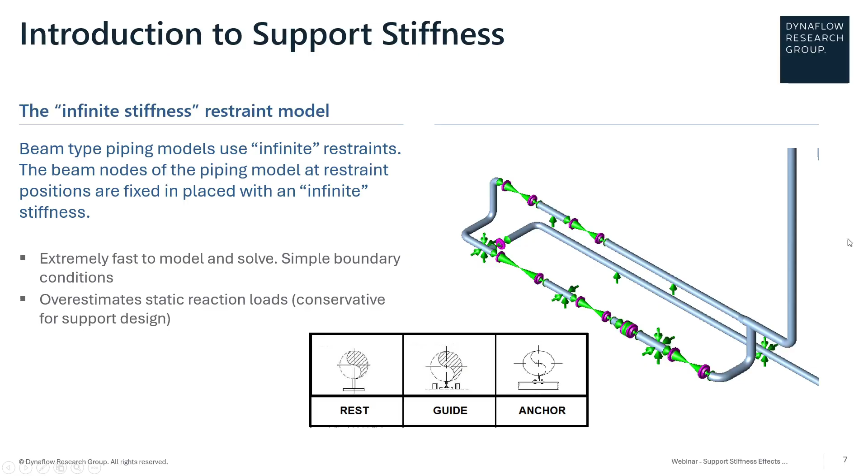But in the real world, a pipe support is not infinitely stiff. Take for example this pipe guide support on top of some steel beam. When we apply a force to the pipe, the support beam will bend somewhat, and how much it will bend will depend on how thick and how long the beam is. Here we give a formula for calculating the stiffness for such a beam.

It depends on the Young's modulus of the material, E, the area moment of inertia, I, and the length of the beam, L. From the formula we can see that the length has a very large influence because it appears in the formula to the power of 3. The area moment of inertia depends on the steel beam's cross-section, where we can roughly say that the more material the cross-section has away from the central axis, the stiffer it will be for bending.

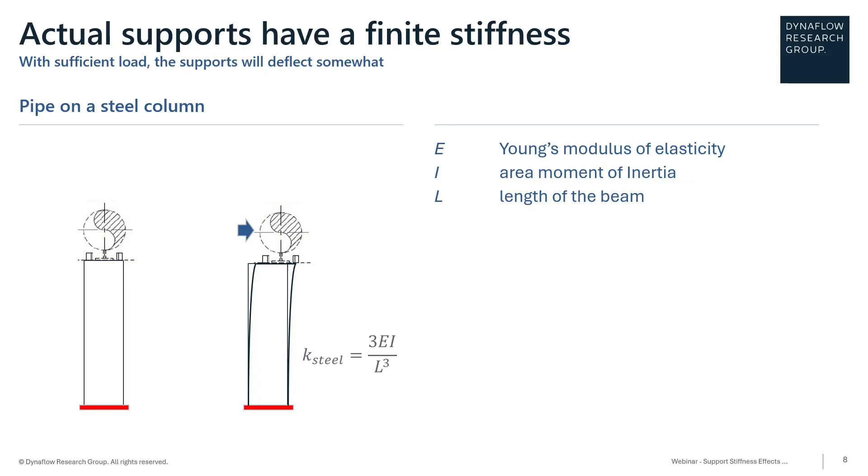Not just the steel structure has a stiffness, the pipe shoe also has a stiffness. In the case where more complex structures are involved, we might have structures on top of structures in order to have combined stiffnesses. And depending on the design of the shoe, these can be either relevant or not relevant.

When there are two things, each with a stiffness, and they are combined in series, then the combined stiffness can be calculated with the formula shown on the right here. The main takeaway from this formula is that if one of the two stiffnesses is much higher than the other, then the combined value will be close to that of the lower of the two. And when the stiffnesses are the same, then the combined value is roughly half of the individual stiffness.

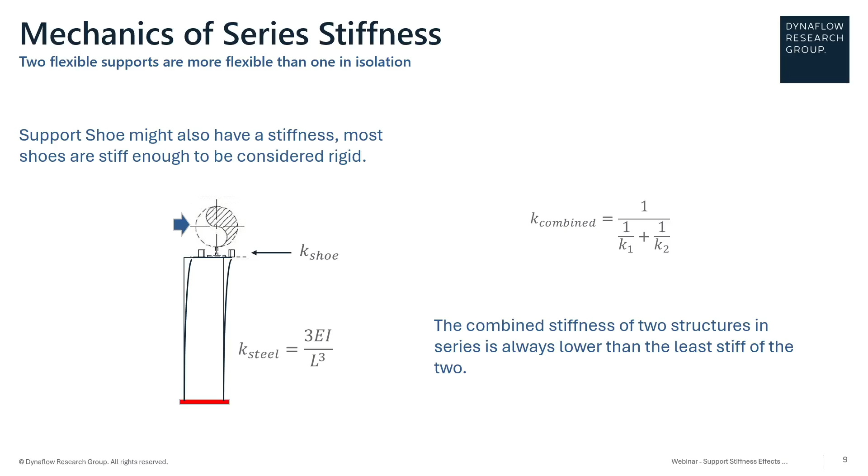So in pipe stress analysis, as we discussed, rigid supports are commonplace. Many stress analysis packages will assume a default stiffness for rigid support, which, in the case of CAESAR II, is 10 to the 12th pounds per inch. As we discussed before, for static analyses this is often acceptable or will even lead to conservative designs. But for dynamic analysis, this will lead to an overestimation of the mechanical natural frequency of the system.

The mechanical natural frequency of a spring mass system is given by this formula. So it goes with the square root of the stiffness, K, over the mass. And in case the stiffness of a system is modeled much higher, we will also overestimate the mechanical natural frequency that's calculated.

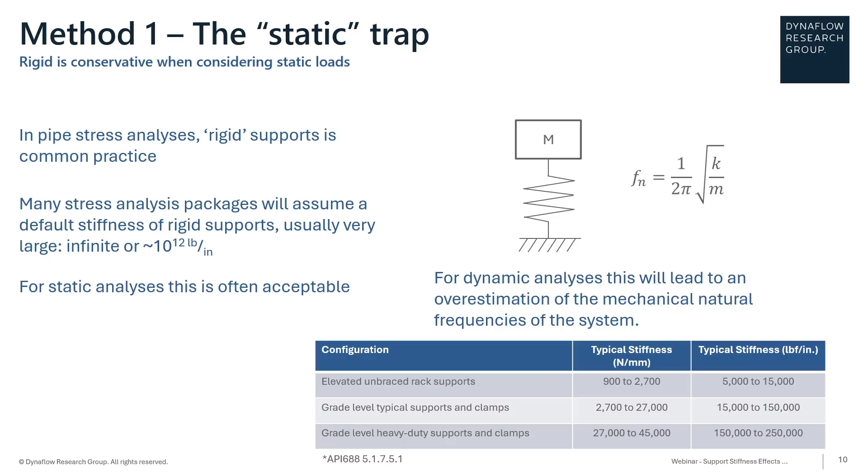In this table, we show some typical values for axial support stiffnesses as defined in API 688. If we compare the 10 to the power of 12 pounds per inch with the typical stiffness values, even at grade level with heavy duty supports and clamps, we reach roughly 250,000 pounds per inch as typical. So this is many orders of magnitude lower than what CAESAR will use as a default support value. If we then look at the actual modes of the system, those will be way off.

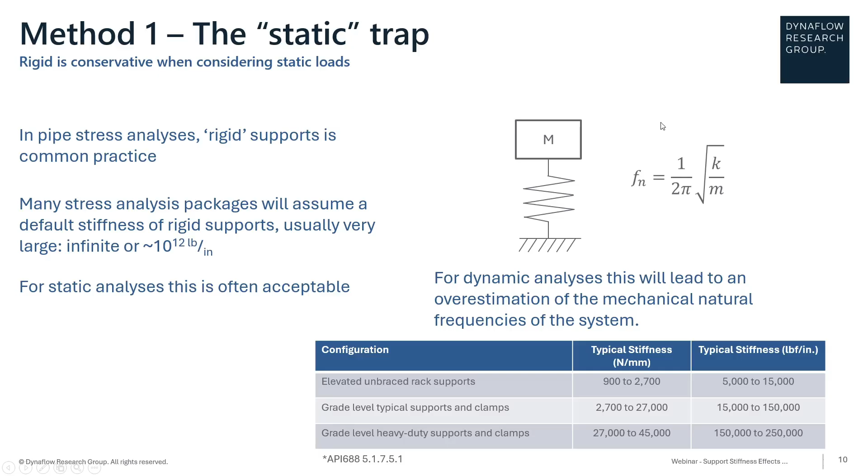So let's talk a little bit more about this resonance of systems. Let's take a look at what happens when we suddenly apply a load to a mass spring system. First off, if we apply a static load to a system, we can use a simple formula to calculate what would be the maximum displacement. In the graph on the right here, I've indicated that with the orange line.

If we apply this force dynamically, so on the left side we show the force versus time graph, where at time 0 no force is applied, and then it's very quickly ramped up to one value and kept constant after that. Then the response of this mass spring system will be that the system will first overshoot the static response value, then it will come back down and it will oscillate back and forth until it finally stabilizes on the same value as what we calculated from the static response.

This type of graph we can use to calculate what's called a dynamic load factor. The dynamic load factor is defined as the maximum response of the system in the dynamic case compared to the maximum response in the static case. So keep in mind that in both those cases the amplitude of the force is the same. It's just that the timing is different.

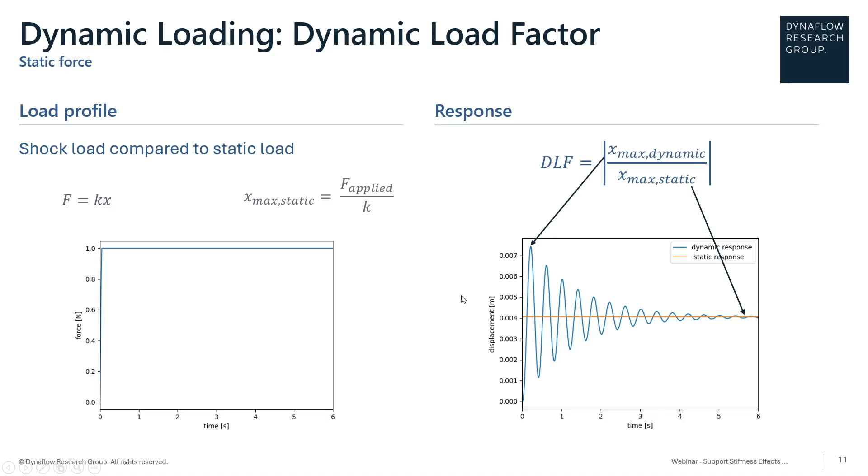But what would now happen if, instead of applying a shock load where we instantaneously raise the force to a constant value, we vary the force with a specific frequency? Now it depends on the frequency of the force with respect to the system's mechanical natural frequency, how high this dynamic load factor can become. The maximum value is obtained when the forcing frequency exactly matches the mechanical natural frequency.

On the right side here, we have a formula that can be used to calculate what the dynamic load factor would be. It's a function of the forcing frequency, omega f, the mechanical natural frequency, omega n, and beta, which is a damping ratio.

On the left side, I've plotted this expression for a different number of damping ratios. And you can see that when the forcing frequency is very close to the mechanical natural frequency, so their ratio is close to 1, we can get a very high amplification of the movement.

It is important to know that API 688 specifies a damping ratio of 1% unless other values are available. And in the case of 1% damping, the DLF for a harmonically driven force on a mass spring system is 50. Meaning that the response of the system, or the displacement, can be 50 times as much as the static force when it's applied harmonically at the mechanical natural frequency.

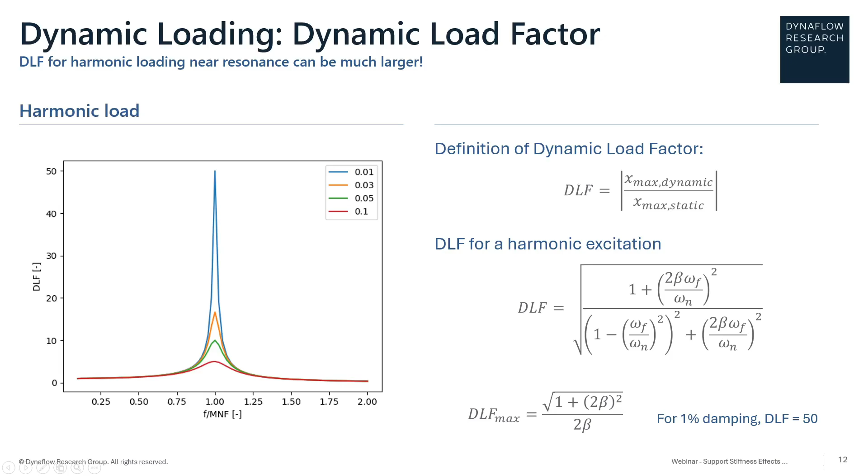We have shown this formula before, the mechanical natural frequency of a mass spring system. If we look at an actual stop in a pipeline, and it will be modeled as, in air quotes, infinitely stiff, this would give an infinite resonance frequency. However, this is incorrect, and a realistic value of the stiffness could yield a mechanical natural frequency that's close to the excitation frequency.

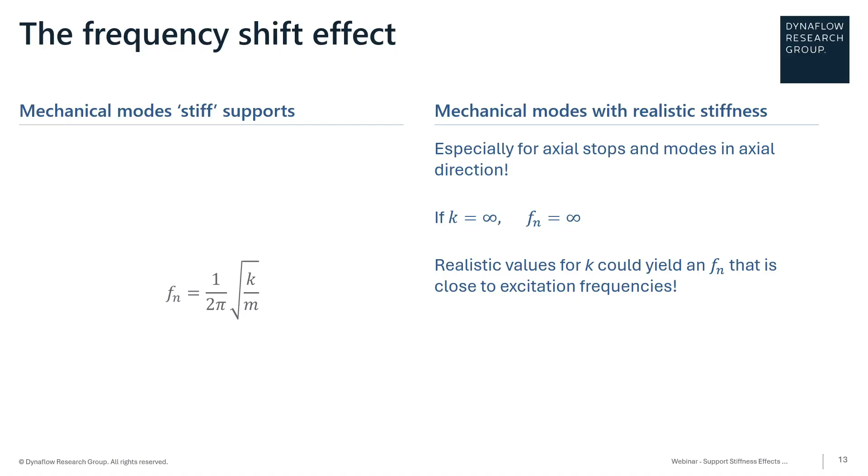The API 618 code talks about separation margins to deal with this issue. And in order for a design approach 2 study to pass, the mechanical natural frequency of a support or of the piping system as a whole must be shown to be separated by at least 20% from the first and second harmonic of the excitation frequency. The excitation frequency will be fixed by the running speed of your compressor.

As an example, if a compressor is running at 8 Hz, that means that the support should be so stiff that the mechanical natural frequency is at least higher than 19.2 Hz. So 20% over 2 times the base frequency.

If axial supports are modeled as rigid, this might be achieved. But in reality, it's not straightforward to create a support structure that's so stiff that it will have a mechanical natural frequency this high, especially when the pipe is at an elevation. You can think back to the table that I showed before with the typical support stiffnesses.

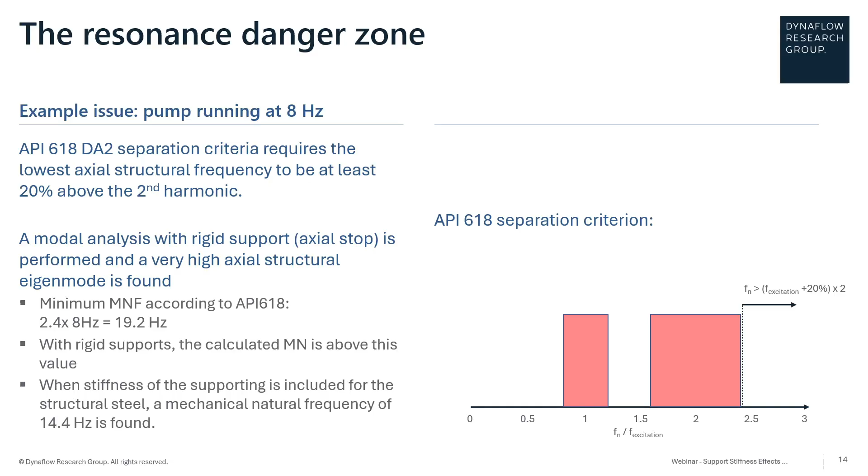All this will serve as a warning to help you realize that when a dynamic study is performed, the supports need to be included in more detail than what is required for a static analysis. But if this rigid supporting is not sufficient, how can we do it better?

And this brings us to method number 2. So instead of modeling the restraints with an infinite stiffness or the very high default stiffness, the stiffness of the support will have to be calculated separately. And this can be performed, for example, by a structural department that does the calculation for your support structure, or by you yourself. And you can use various methods to calculate these stiffnesses,

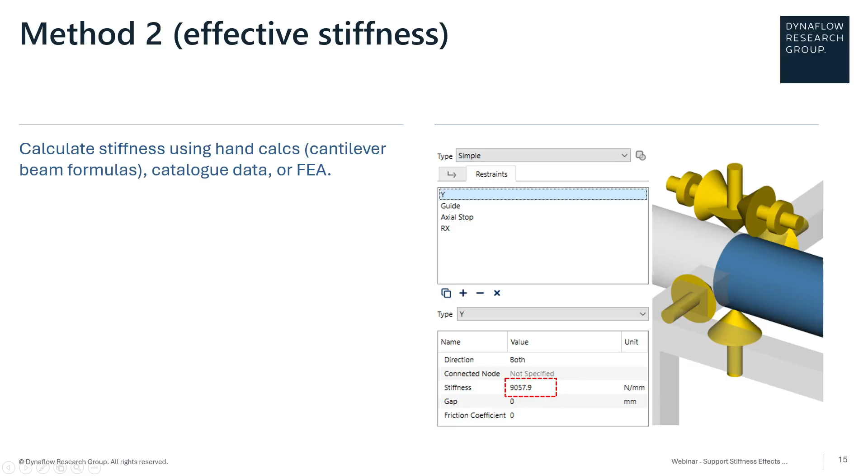So let's have a short overview of comparing those modeling methods. Method number 1, in which we will assume that the supports are, in air quotes, infinitely stiff. This will overestimate reaction loads in static calculations, and as we discussed before, is not suitable to be used in dynamic analyses. The modeling effort is low and the computation speed is the fastest. So this method should be used for simple static stress analyses.

Then method number 2, where we model the supports as springs, is a realistic way of doing static analysis, but does not have the same conservatism. And for this reason, method number 1 is preferred for the static analyses. Method number 2, however, is suitable to use for dynamic analyses.

It lowers the calculated structural mechanical frequency to a realistic range based on the flexibility of the calculated support. In terms of modeling effort, it requires some additional steps to input the stiffnesses for each of the supports, and those need to be calculated, of course. The computation time is still fast. The additional stiffness adds some complexity, but the number of degrees of freedom for the system remain the same as in method number 1.

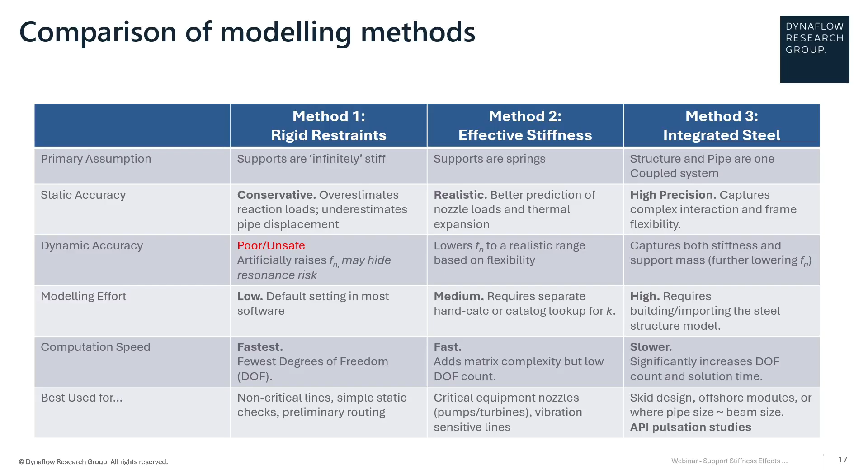The best use cases for method number 3 are skid designs and offshore modules, especially when pipe sizes are similar in size to the beam sizes. And also API 618 pulsation studies. The integrated steel is the best used method.

To summarize a little bit, for standard piping, method 2 is a choice. If you have some kind of dynamic force, method 2 can be sufficiently accurate, especially if most of your supports are single support posts that are relatively close to the ground.

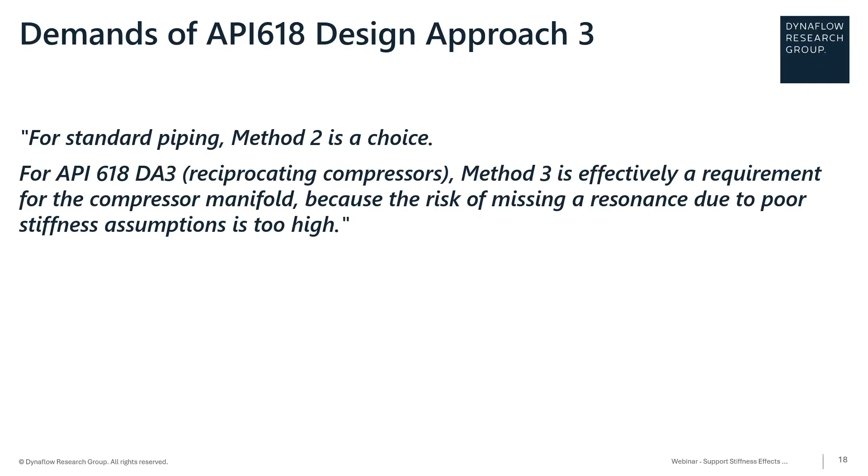However, for API 618 Design Approach 3 of reciprocating compressors, method 3 is effectively a requirement, as the stiffness of multiple elements, and not just the piping and the supports, but also the stiffness of the compressor body and the pulsation suppression devices needs to be accounted for in order to have an accurate prediction of the mechanical natural frequencies of the systems that are going to be used to calculate the vibration levels in order to pass the API assessment.

Let's next have a look at a few examples of how we can use these modeling methods in our program.

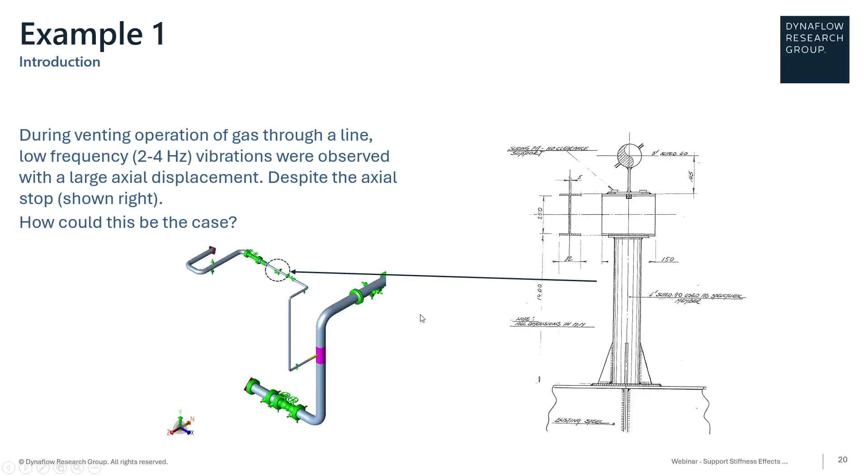The question is now, how could this be the case, as we have these large axial displacements? So let's first have a look at if we import this model into BOSpulse and see what the model will look like and how the mechanical natural frequencies are.

So I have the model here in CAESAR. I'm going to first show our effortless import feature of BOSpulse for CAESAR models. So I'll close this CAESAR model.

In the main interface of CAESAR, I will go to Interfaces, CAESAR II neutral file. This opens a pop-up that allows me to convert the CAESAR II input file, our model file, into what they call a CAESAR II neutral file. This neutral file can be imported into BOSpulse. So press convert.

And then once it's been finished, I say I don't want to do another one. And I can close out of CAESAR.

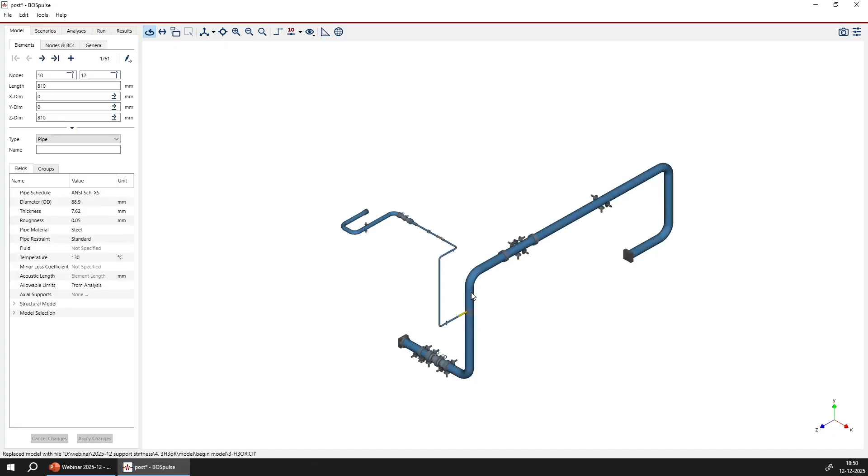I already have BOSpulse open with a new model, nothing inside of it yet. I will import a file. I select the .CII file, or CAESAR II neutral file. Press OK. In this case, I would like not to merge the elements. Press OK, and now here we have it. So as you can see, the CAESAR model is fully compatible with BOSpulse.

Here at this location, we have the axial stop, where the problem occurred.

So we'll set up an analysis to look for the structural modes of this system. As the analysis type, we'll select structural modal, and as the input we can specify from which frequency to which frequency we want the software to find the mode.

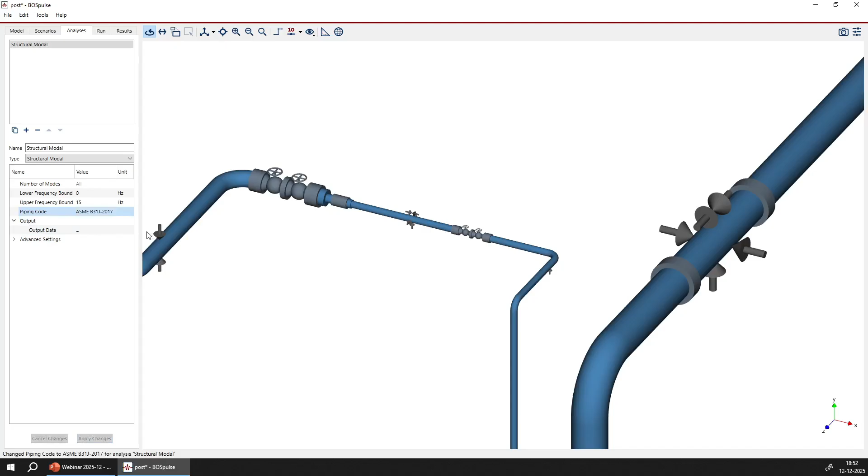The introduction to the problem gave that frequencies between 2 and 4 Hertz were observed. So I think if we go up to 15 Hertz, we should be able to see more than we actually need to. Under piping code, there's a possibility to choose one of the different piping codes, and this will be used to calculate the stiffnesses and flexibility factors of bends and T-junctions based on this code. I'll select the B31J since this is the most accurate in terms of stiffnesses.

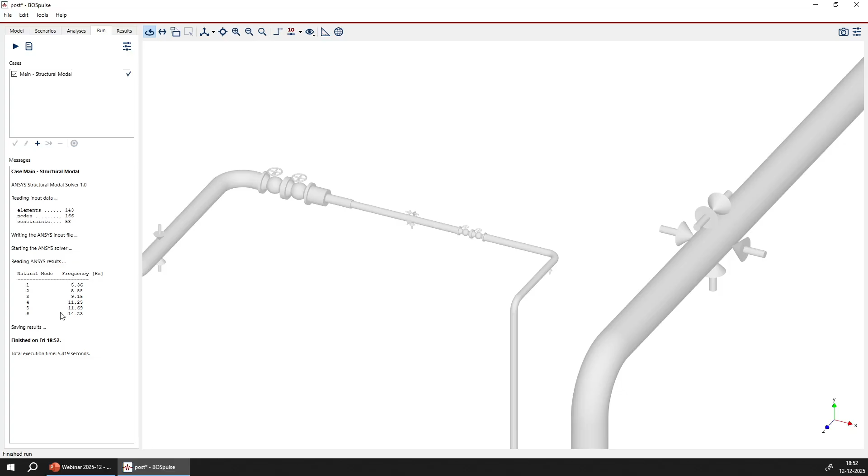Then I can go to run. We'll combine the main scenario with the analysis that we just started, and we can press the play button to run. In the background, this model will be sent to the ANSYS solver, and the result will come back into BOSpulse. So it's already finished.

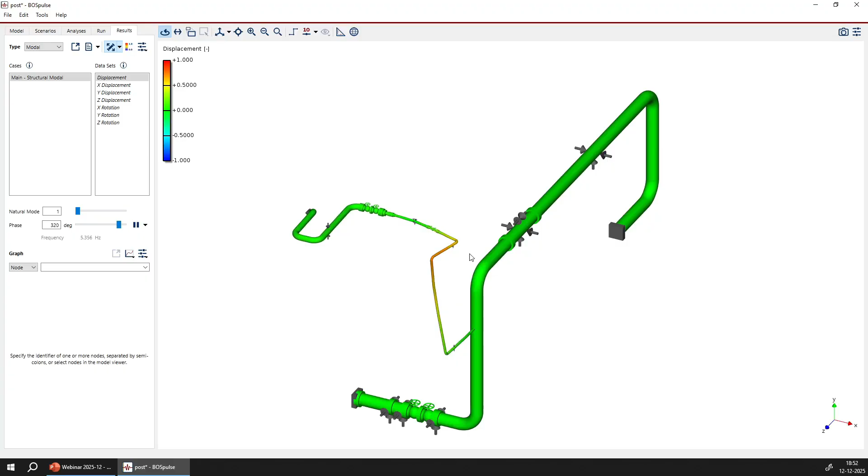I'm able to visualize the results now. I will find that for the first natural mode, if I press play, you can see the movement. So indeed we see movement of this area, but it doesn't match with the observed large axial displacement.

We look at the second waveform. We have a frequency of 5.9 Hertz. It's also moving differently than what was observed in the field. And then the next one is already at 9 Hertz, so it's a much higher frequency.

So let's go back to the drawing for a little bit. As we've discussed previously, this axial stop is modeled as a rigid support, but is this actually a rigid support? In order to assess that, we can have a look at the different parts of the steel structure.

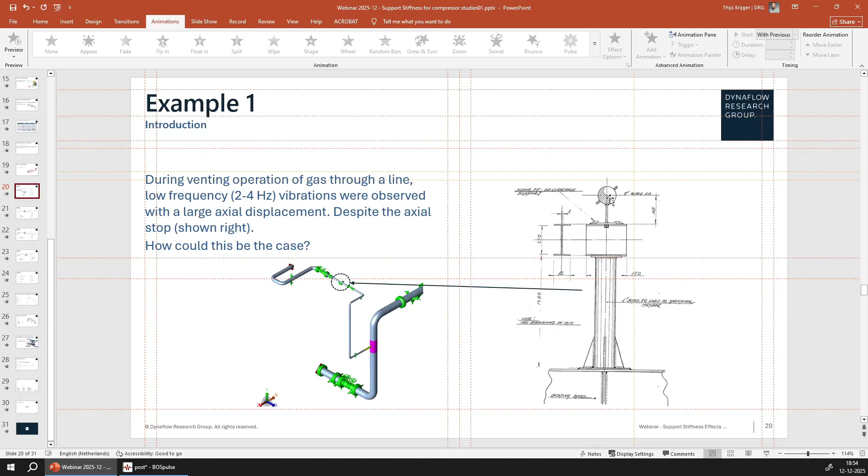The important thing for this example is what we want to look at: the axial stiffness, for a force that's out of plane or in the axial direction of this piece of pipe. We can do a calculation of what the bending moment stiffness would be of the different components. So we can identify the shoe, this I-beam, and this cylindrical support post.

First for the shoe, we can look at the cross section. We'll have, for the bending in the out of plane direction, if we look at the cross section - this would be the top of the cross section of this plate under the support shoe. We can calculate using standard formulas what would be the moment of area. Once we've calculated that, we can input that into this formula for the stiffness for this bending. We'll find a value of 82,000 newtons per millimeter.

The same thing can be done for this beam. Now, something you might have already observed is that this beam is being loaded in the weakest direction. We're going to have a force from left to right at the top here, and there's almost no material here that can withstand that bending. Schematically, we can look at this thing on the center here, and almost all the material is close to the central axis.

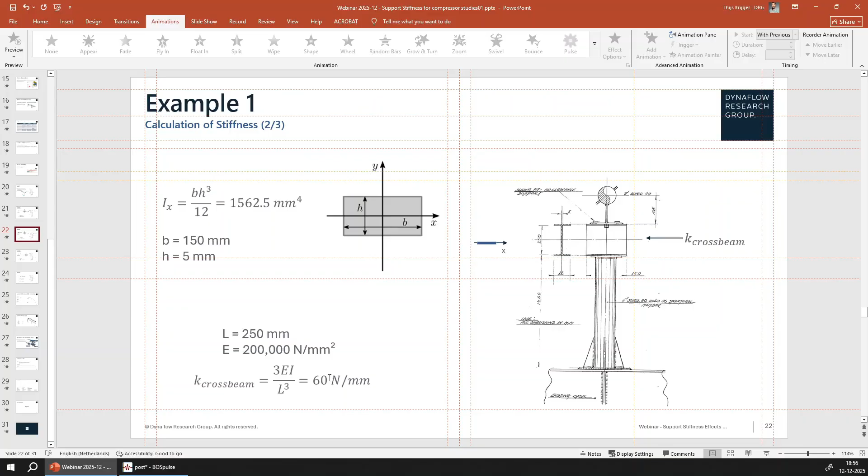So the second moment of area is going to be very small. And if we input that together with the length of this beam, we can find the value, the total value for the stiffness of this beam against the bending in that direction, to be only 60 newtons per millimeter.

Now the same thing can be done for the cross section of the pipe here. We use a standard formula to calculate the moment of area again, using the inner and outer radius of this pipe, and we find a value of 14,000 newtons per millimeter.

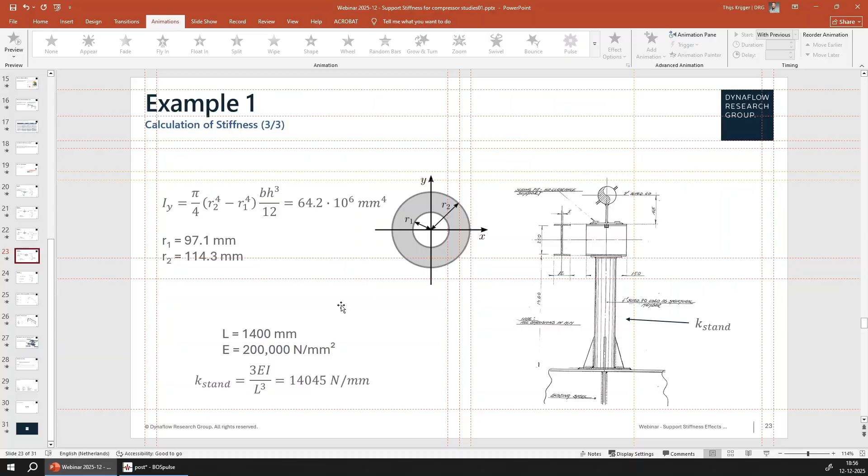Finally, we can combine those in order to get the combined stiffness that we can apply on our restraint at the node here. If we combine those three, you can see that it's going to be dominated by the lowest one. So for the cross beam, it's 60 newtons per millimeter, and then the combined one is slightly below that value, so roughly 60 newtons per millimeter.

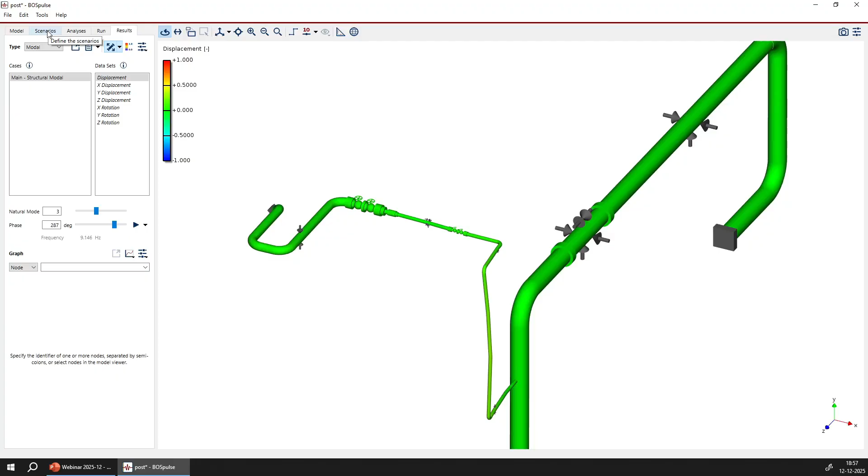So let's input that into our BOSpulse model. In the Scenarios tab, I will create a new scenario, and we'll call it method 2. Now we're going to make a variation of the main model inside this scenario, where under the support definitions, we'll look for the axial stop. In this case, it's in the X direction, and we can specify a stiffness value - we'll input the 60 we calculated before, or let's be precise, the 59.6.

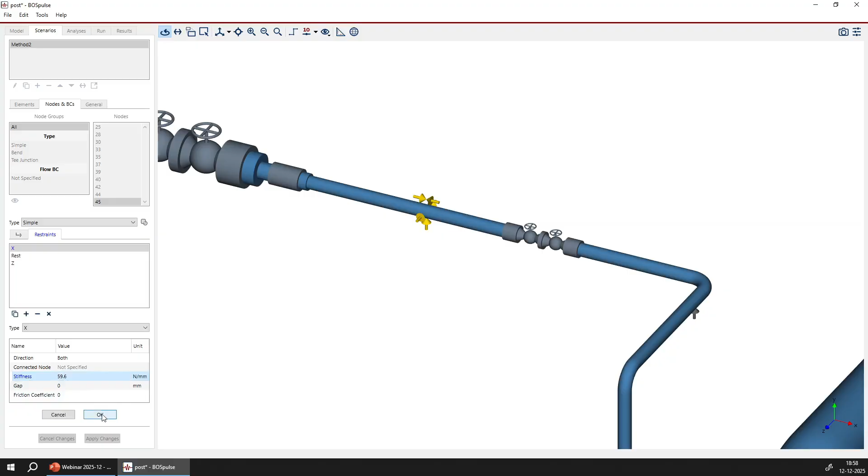We'll press OK. Then under Run, we can also combine the new scenario with the same analysis type. If we run that, we can also have both results available to us, so we can use that to compare.

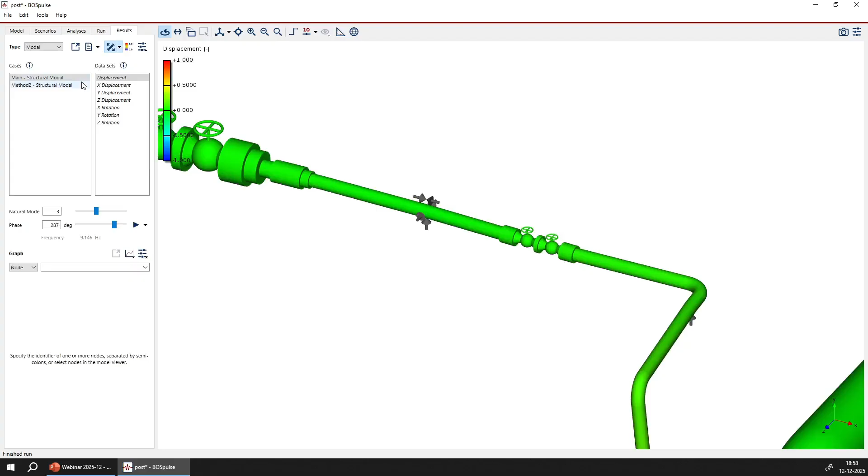So now, if we look at the lowest natural frequency, we find a value of around 4 Hertz, where we have this movement. So this already matches much better with the description that was observed by the people in the field.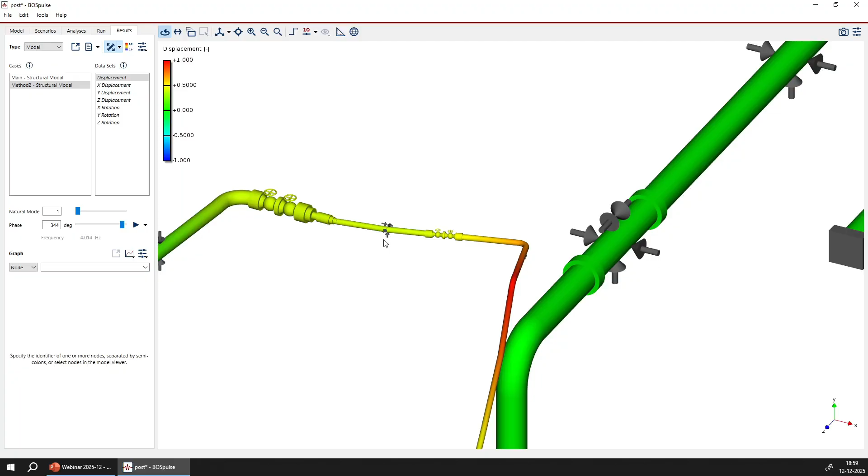So there's another method that we can use. We can also model the steel frame. So let's do that next. We'll add a new element.

We'll start by node number 5000 to be well away from all the other node numbers in the model. And we can use an ANSI schedule 80 pipe, which was what the support was made out of. The diameter will be 4 inch, and then our database will automatically fill in the thickness corresponding to schedule 80. The length of this thing was 1400 millimeters, and it was in the Y direction.

Right now it's located here at the bottom of the model because I haven't connected it to any piece, so it'll just be at the origin.

Now on top of that, we want to model this I-beam. BOSpulse has different structural beams included as options for structural members. We press plus to add structural beams - we have I-beams, channel beams, T-profiles, L-profiles, rectangular beams, or a beam for which you can specify your own moment of areas. So it can be basically any profile.

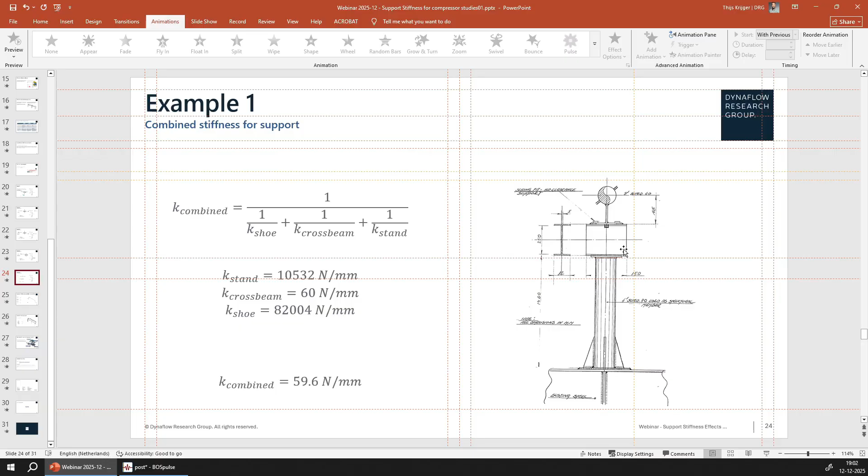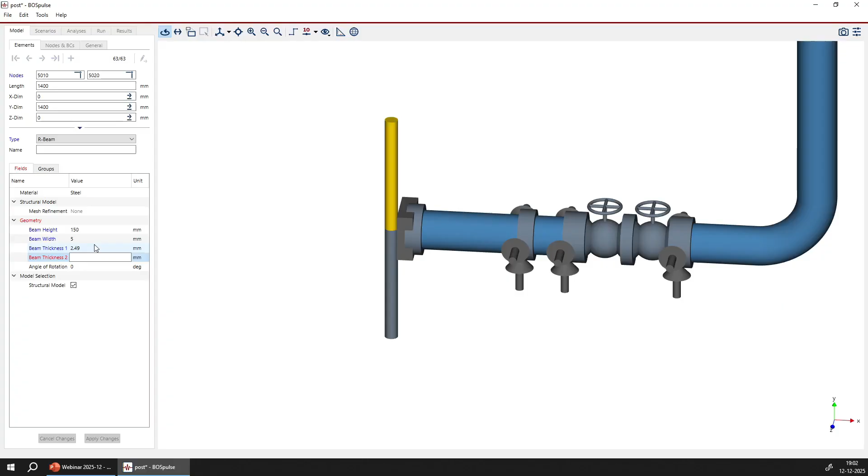So what I will do here is select an R beam, which is just a rectangular beam, and input the height and width to match the cross section. It's 5 wide, and as thickness we'll put half of the width, the total width of the cross section, so to make it a full square. The height of that thing was 150 millimeters.

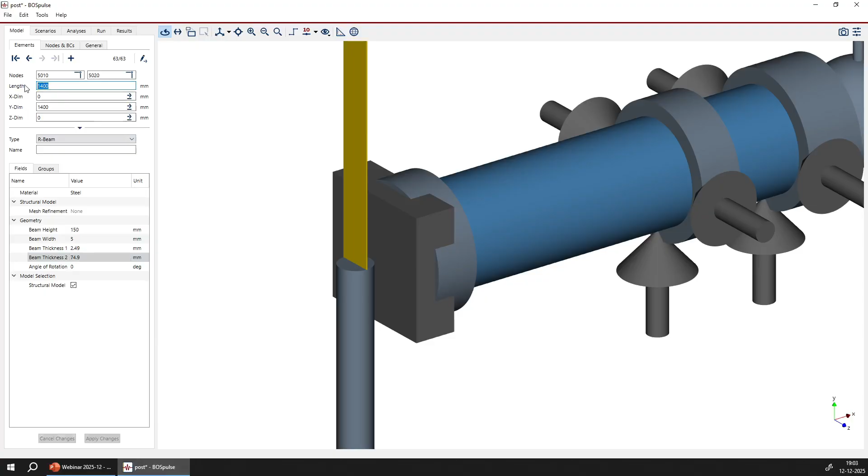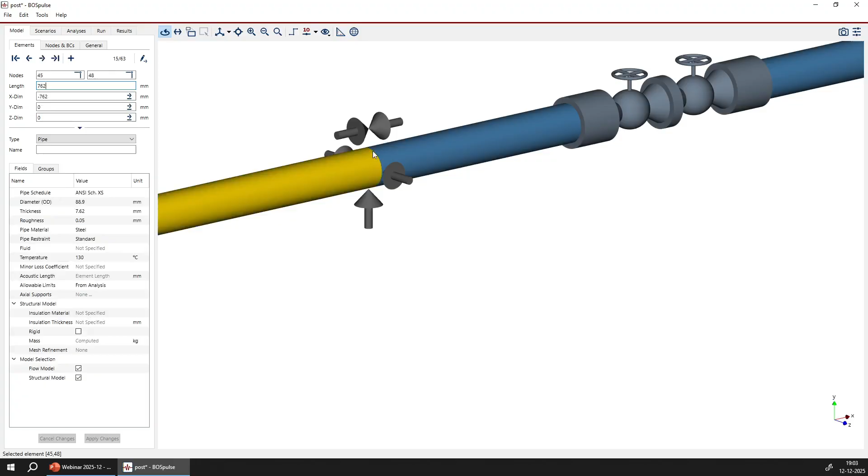And we've already seen that this was actually the most flexible thing. So I will skip the modeling of the shoe for now, and we'll connect this directly to our model here. This support node is node number 45. Then I'm going to make a new scenario where we will connect it to the system.

Method number 3, in this one we'll go to this support definition, and then we'll use connected node to connect it to the top of this I-beam profile. The same for the restraints in the other direction.

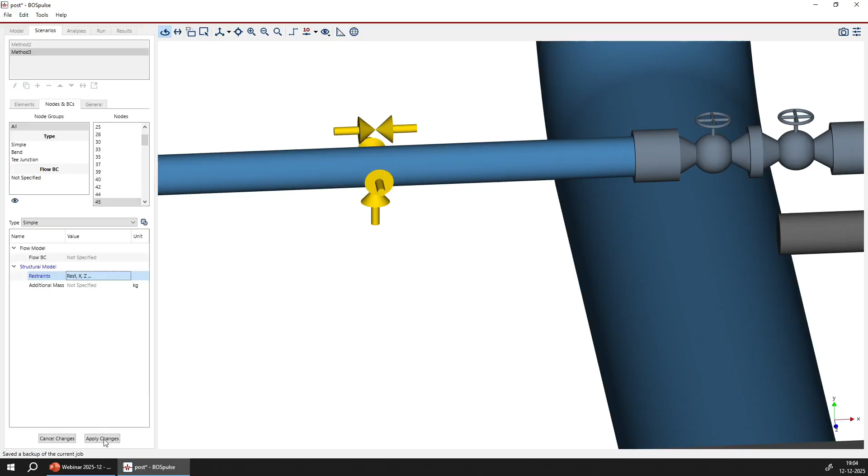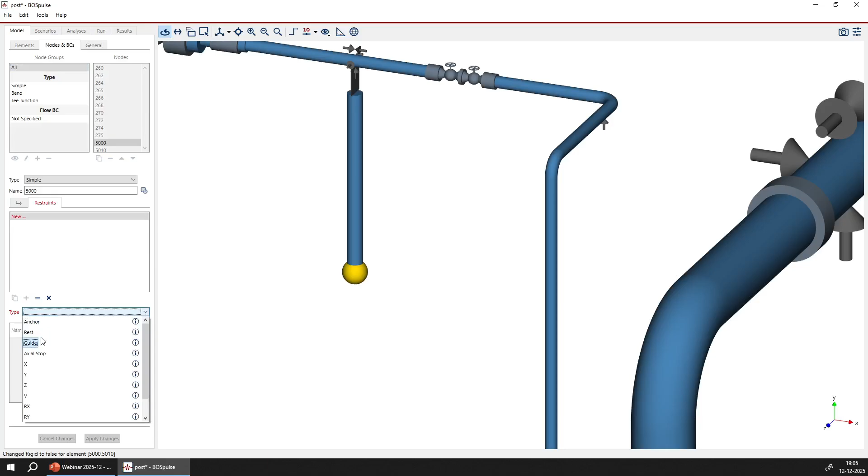So you can see it's not moved yet, but if we ask the software to update, we can move all the connected nodes to the same position. See that this one is specified as rigid - it's not the case, it's just a piece of pipe. And then at the bottom of that piece of pipe, we'll put an anchor where it's restrained to the ground.

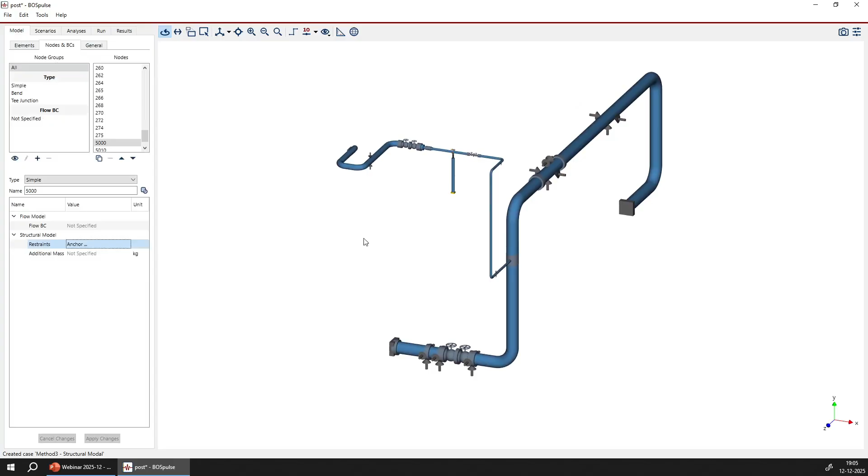Now we can run the analysis again. We'll add method number 3. And then, just to be sure, in method number... in the main part, we'll remove this from the structural model, so that the other two scenarios don't have this part included.

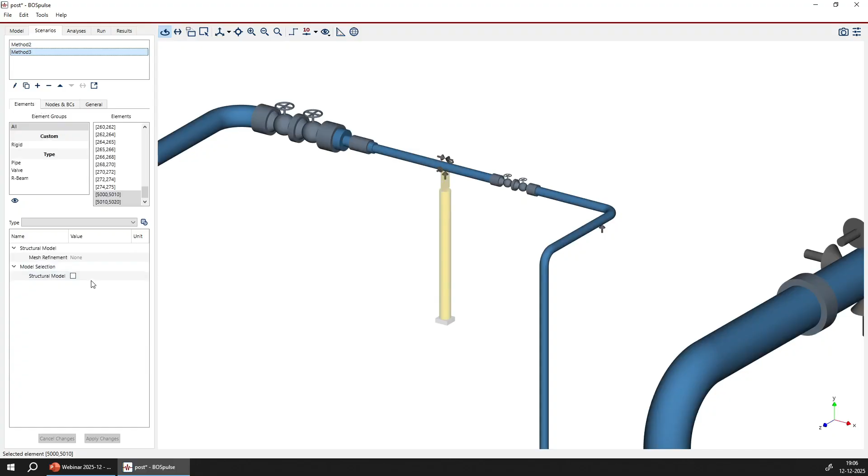And method number 3, of course, will have to enable it again. Now we'll run the 3 cases again. You can see, have a little look at the differences.

But here we find again a mode in which there's a large axial displacement at this axial stop, and in this case with including the supporting steel, and now we also include the masses of this piece of pipe that's moving, and we find a value of 3.5 hertz.

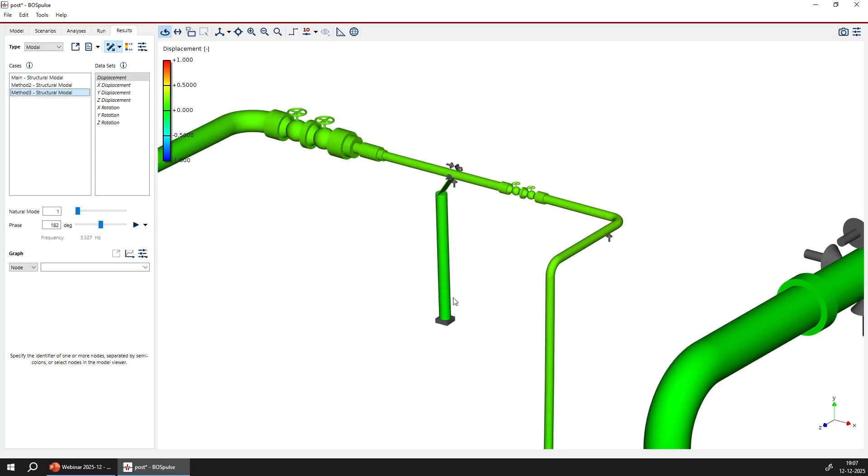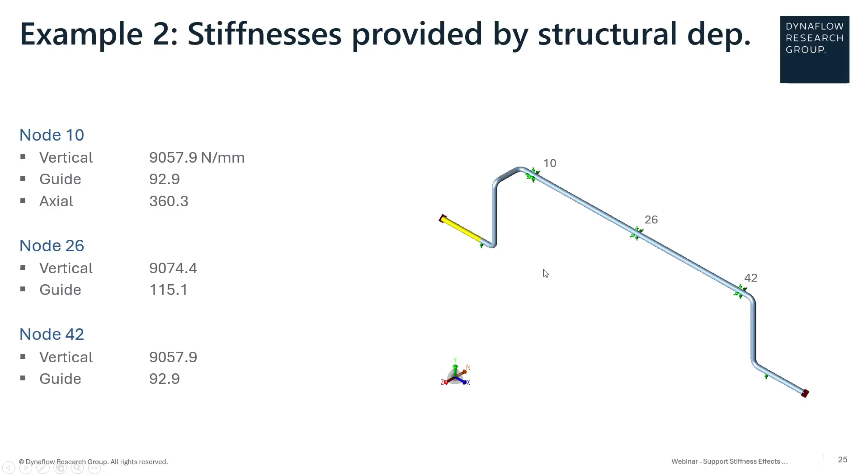So let's now move on to the next example. In this next example, we're going to have a look at this piece of piping that runs over a pipe bridge. In this case, the structural department has already provided us with the stiffness of the different supports on the pipe bridge, and I've already gone ahead and modeled that into BOSpulse. The next thing we'll do is model the pipe bridge itself, and I'll show you how you can easily do that using the structural I-beam modeler.

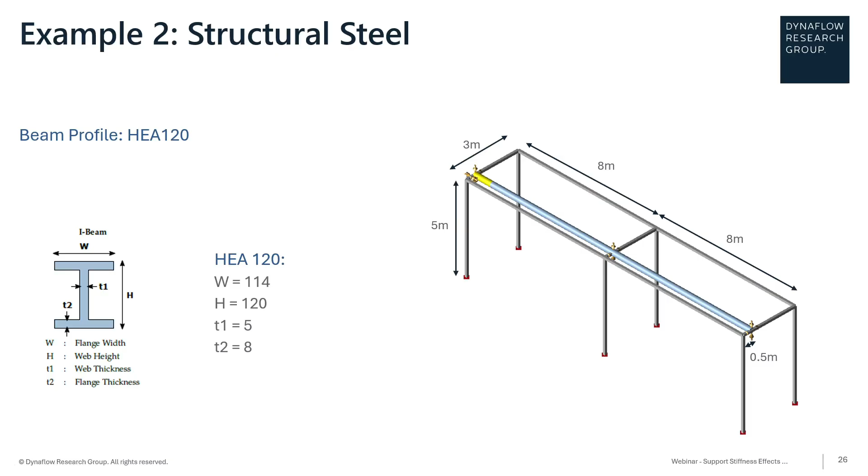So let's go into BOSpulse. Here you can see the model. It's already as described. Under scenarios, I already have 2 different scenarios - one where the supports are modeled as rigids, and one where we've calculated the stiffnesses. We go to support - you can see that the stiffness for the Y direction, the guide, and the axial stop are already input.

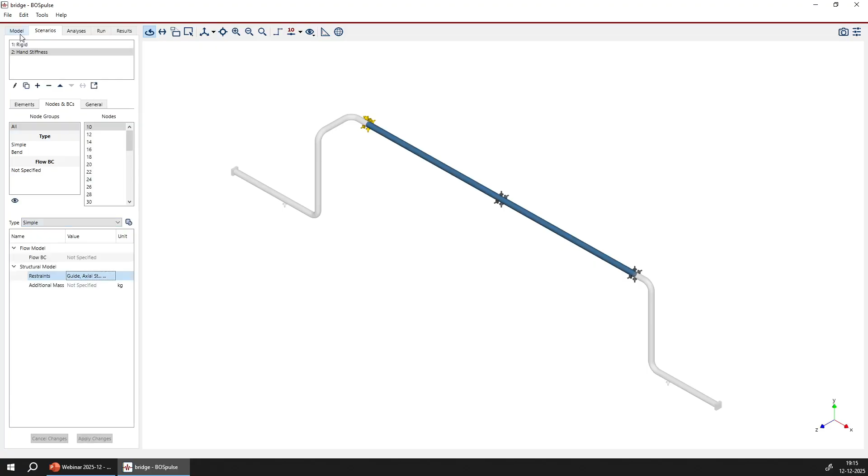So next up, we'll show how you can relatively easily model a bridge structure as it is shown here.

So we'll go to our modeling mode and start by creating a new element. I'm again going to start at 5,000, and in this case I'm going to go to 6,000. I'll start by modeling this leg here, so we'll go up 5 meters, and we'll change the element type to an I-beam.

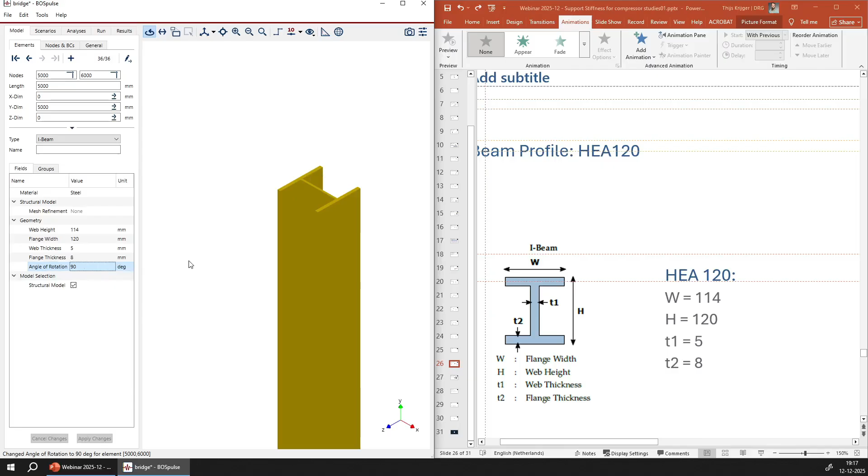The profile was given here, so it's an HEA 120 - a pretty standard beam. Used for the web height, these values - the web thickness is 5 millimeters and the flange thickness is 8. I know that in our case the beams are oriented in this direction, so I'll put a 90-degree rotation on it.

I will also for now untick this box for structural model, so that we can again do the same thing as in the previous example, where for the other 2 scenarios these beams are not included, and then for the 3rd scenario I will include them.

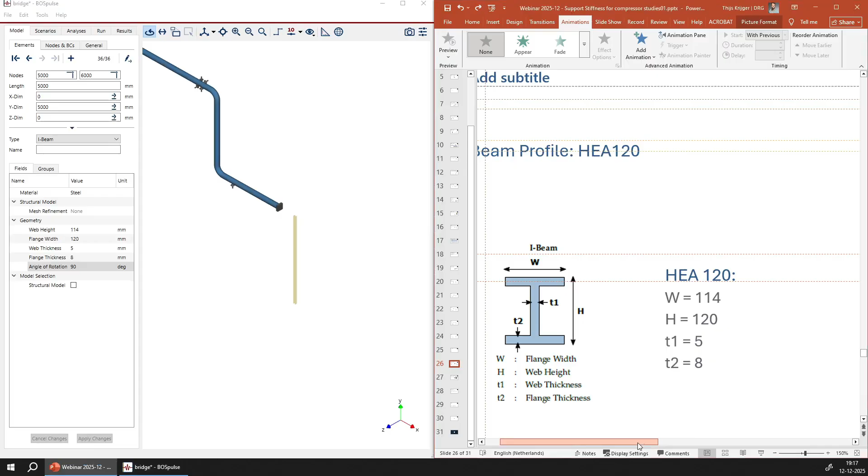So I've modeled the first leg, and now I'm going to choose my node numbers in such a way that I can easily replicate the repeating structures. First, I see there's a 0.5 meter distance between the corner and the place where we want to connect our pipe. So the next element will be 500 long, in the minus z direction.

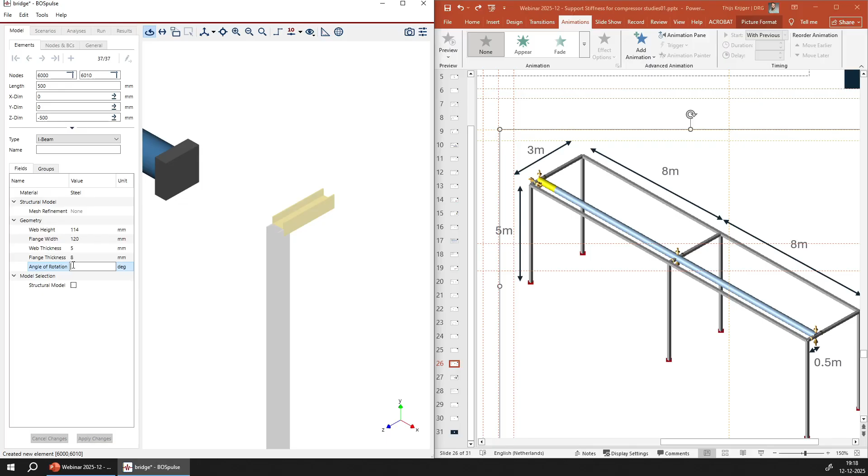Now this one is oriented in a different direction, so this will have to be 0. As a node number, I'm going to use 6100, and then I'll put the next one at 6200 with the remainder of the 2.5 meters.

Next, I'll also add this beam for 8 meters in the other direction, and for that I'll start from node number 6000 and go to 6010. I'll put it for 8 meters in the x direction.

In order to more quickly model the rest of the structure, we can use the duplicate feature. I'll select all of these elements, right click, duplicate elements. Now I'd like one copy, incrementing the nodes by 10, which will create from this one 5000, 5010. It's not connected anywhere from this node, and anything connected to this node will be duplicated and connect to this node.

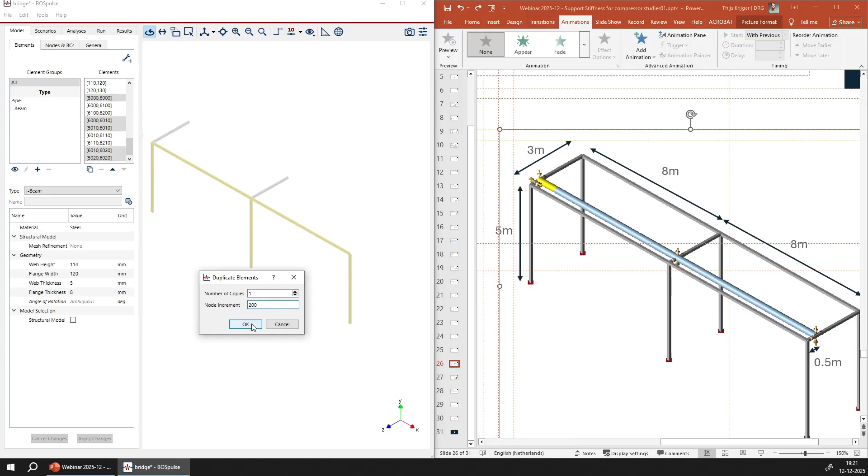Now all we have left to do is move or duplicate one side of the frame to make it on the other side as well. We'll duplicate it again. In this case I've put a node step of 200 between this side and that side, so we'll use an increment of 200. I see I've forgotten to select this part last time, so I'll do this one again with a node increment of 10.

All these supports are connected at the bottom with anchors - these are the legs of the structure, not the supports. So as a restraint, we'll input an anchor for all 6 of them. Apply the changes - so that's there. Now we have our structure.

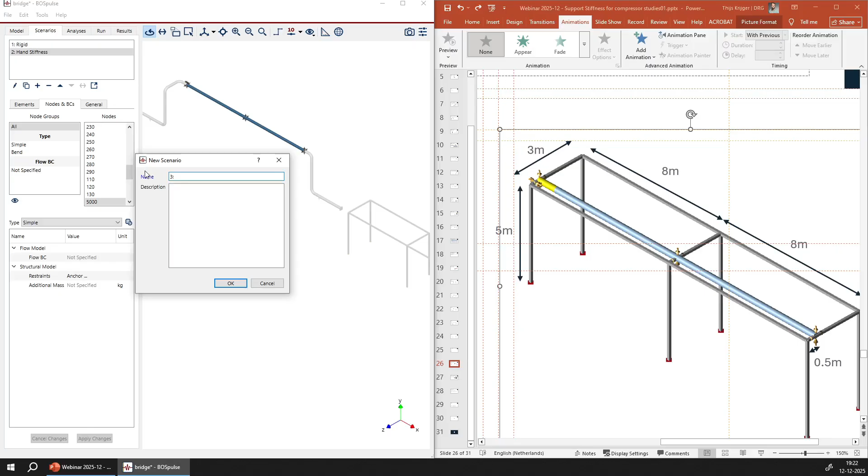Now we'll make our scenario and connect it to this piece of piping. So we'll create scenario 3, and in this scenario we'll start connecting these elements. Select the nodes, then change the connected node from undefined to 6100.

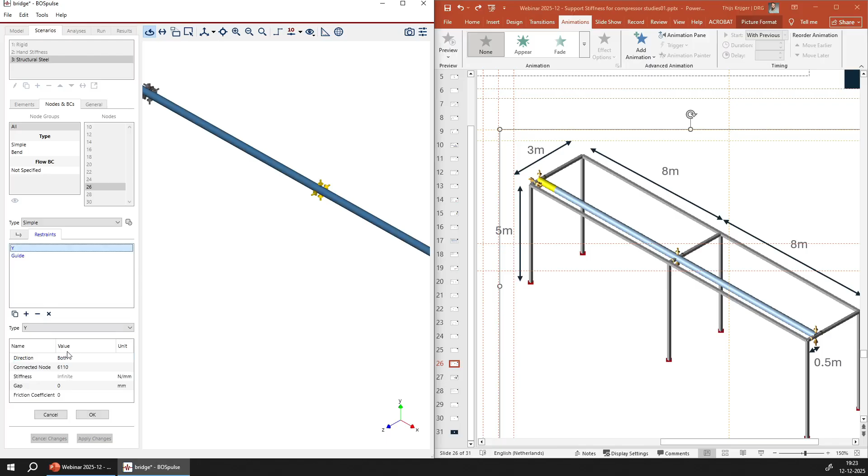Apply those changes, then do the same for this one, but this one's connected 10 higher. Sorry, this is stiffness field. Finally, the last one will also be connected to the frame.

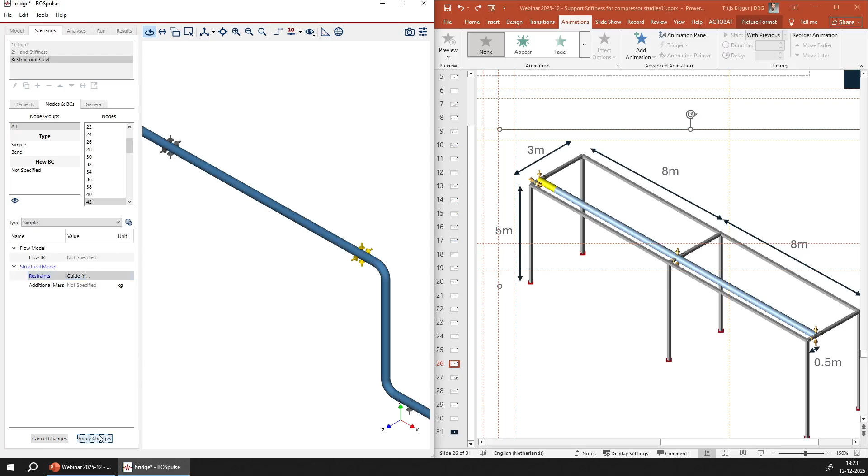You can change the coordinates again to tell the program to update the connected nodes. Now that we have the structural steel in place, we'll have to enable it for this third scenario. So go to the elements in the third tab. We can double click the I-beams to select all of them at once and turn them on in the structural model.

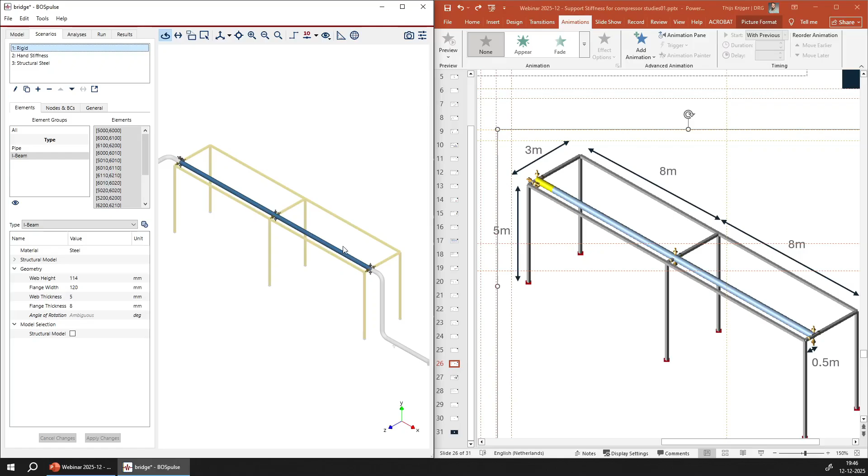In order to make the analysis and results more straightforward to interpret for this webinar, I've limited the piping in the other two scenarios to only the piping on the bridge. So I'll do the same for this last scenario. We'll select those and disable them from the structural model, and then the same here, disabling them as well.

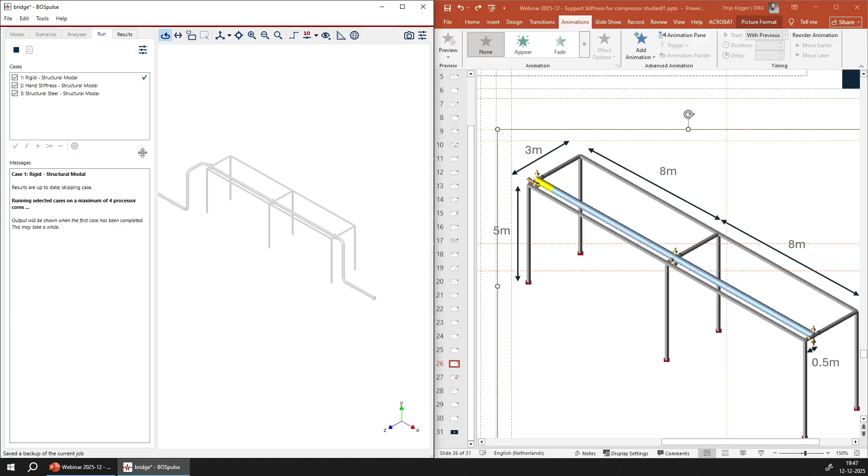We can go to the Run tab, run our models, and then compare the computed mechanical modes between the different methods of analysis.

At mode number 1, we'll find a mode at 0 frequency. This is an unrealistic mode, caused because the rotation around the axis of this pipe isn't restrained anywhere, so it's free to move in that direction. We can visualize it - if I go to the X rotation, you'll see the whole pipe is basically rolling in this mode. This isn't a real case, and we could have fixed it by applying a rotation restraint on one of these supports, so we'll ignore that one for now.

But if we go to the first real mode, when we model with the rigid support, we see this nice sine wave. It's at 11.8 Hertz, so relatively high.

The next one is again at the same frequency, but it's in the vertical direction. Then we'll see higher modes where now the two sections are moving in phase with each other—the same thing, but in a different direction. And now here we see the higher waves, or a double sine wave shape between each of these supports.

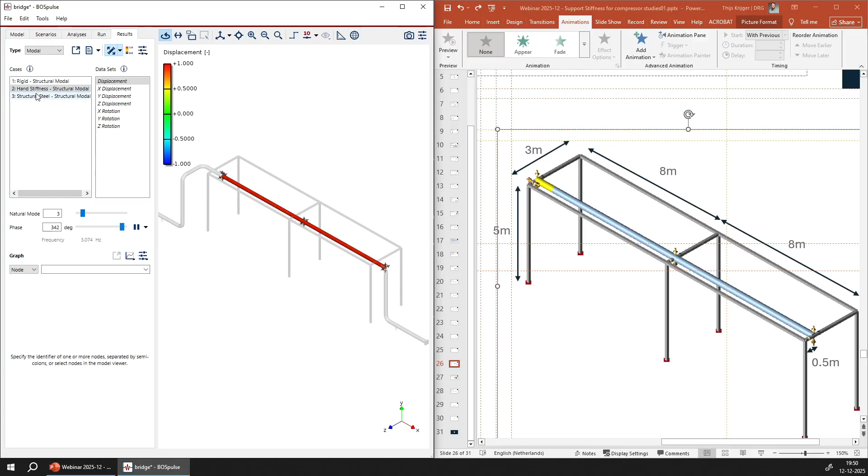Now if I look at the modes from the structural steel, you'll see the mode shapes are a little bit more complex because they involve not just the piping itself but also the movement of the structural members. Going quickly through the different modes: the second mode at 2.2 Hertz, the third one at 2.5, and then at 11.3 we find again where it started with the rigid support.

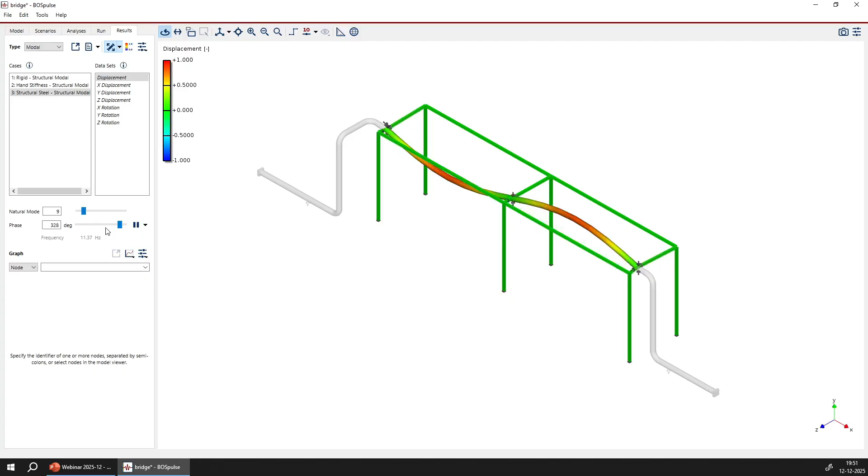Now you can imagine that if you have a lower frequency excitation with the force in the axial direction, it might be important to capture modes that are of this type of shape.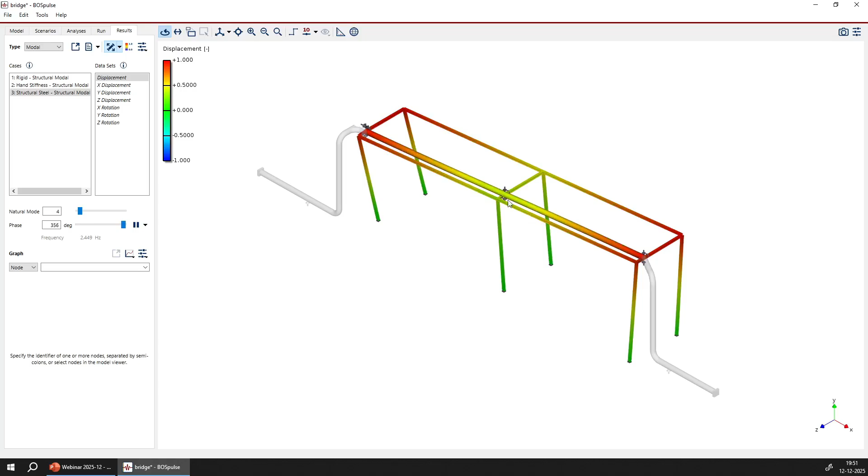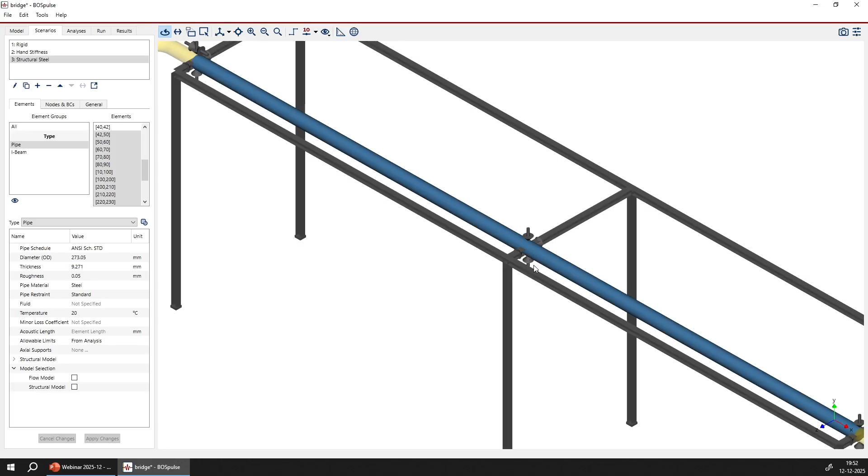So I hope I showed you the different methods for applying the structural connections. In this example, I modeled the connection between the pipe and the supporting steel as a rigid connection. If you have, for example, clamps with a known or pre-calculated stiffness, we could instead connect the pipe through a restraint with the C node with the stiffness of the clamp to the structural steel, which would have another effect on the calculated modes, but would be a more precise method of analyzing.

So to bring it all back, what does this mean for a compressor study? The API 618 demands an accurate calculation of the mechanical response, and to have an accurate calculation we need to include the stiffnesses of the supporting structure, but not just the supporting structure, also of the compressor body itself. On the right side here you see a screenshot of what that might look like for a compressor. There's two throws, pulsation dampeners at the top and bottom. In gray we have the internal gas passage, but we have not included that in the structural model, so it's shown as transparent.

One important thing is the crosshead—this would represent the connection at the crosshead—and API 618 specifies that this should be modeled as a three-way stop with rotational and translational stiffnesses that have to be defined by the OEM. Then this beam would represent the stiffness of the compressor body itself. The cylinder and piston move back and forth in this direction, and this beam needs to have the right properties to represent the stiffness of the cylinder casing.

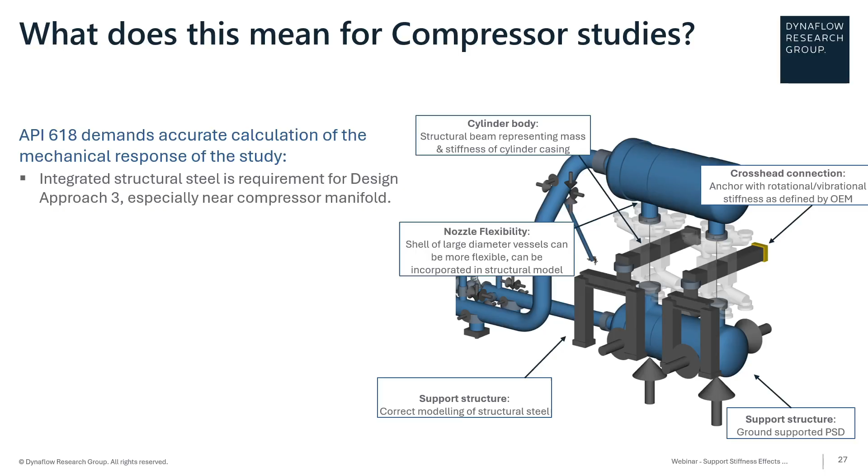In some cases, there's structural steel used to support the cylinders—that would have to be modeled. There's ground supports for the pulsation suppression devices, and in some cases these are mounted on spring supports rather than rigid support. There's also nozzle flexibilities that can be incorporated, computed in different software packages. For example, Nozzle Pro can be used to calculate the nozzle flexibilities in order to get as accurate a model as possible.

So the main takeaway I hope you get from this webinar is that oftentimes for static stress analyses, supports are assumed to be rigid, and for static analyses this is a good conservative choice. But this is not a good conservative choice when looking at dynamic loading, as rigid supports don't predict accurate mechanical natural frequencies. As we've seen before, the overlap between the mechanical natural frequency and the driving excitation frequency, for example from pulsation forces, can give a much higher response than predicted from static analysis. In the case of pure resonance with 1% damping, even up to a factor of 50.

So in order to have an accurate forced mechanical response, it is necessary to model the structural steel, especially around the compressor manifold, in sufficient detail.